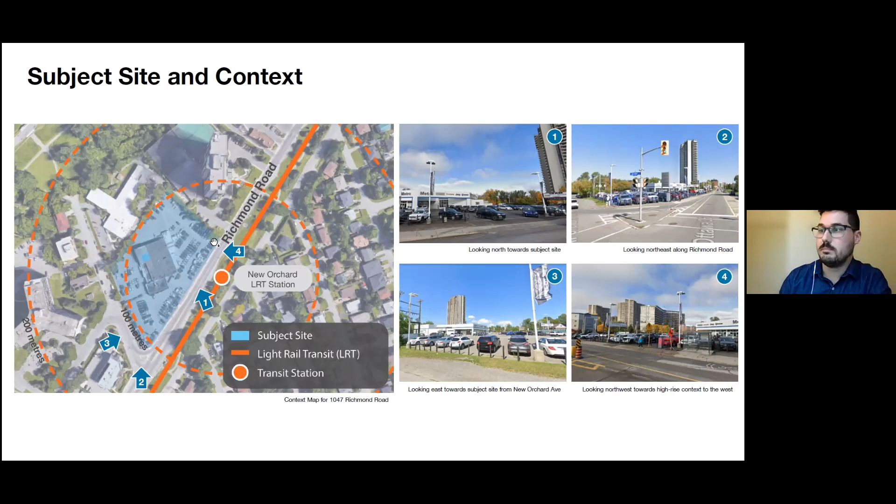If we're looking at the context, image number 2 is really good at looking at the corner of New Orchard Avenue and Richmond Road, which shows the single-story vehicle car dealership currently at the site, as well as some of the high-rise context currently around the property, including the 28-story condo building just to the east, as well as high-rise buildings along Ambleside and further to the west. To the north, there's the New Orchard Lodge, as well as walking paths and bicycle paths along the parkway. The plan context here really seeks to accommodate high-rise built forms, specifically along Richmond Road on the northern edge, closer to the LRT stations.

This slide discusses City of Ottawa official plan policies. With these applications, a review of the current City of Ottawa official plan, as well as the forthcoming new City of Ottawa official plan, was conducted. Under the current official plan, the site is designated Traditional Main Street. The plan context for Traditional Main Streets is a development pattern that seeks to promote a mix of uses, continuous storefronts, and densities that support pedestrian environment and transit. There are policies that encourage dense and mixed-use development near transit and that support increased walking and cycling. Typically, mid-rise development is permitted along main streets; however, a secondary plan or area-specific policy can permit greater building heights or high-rise buildings.

Policies for traditional main streets really support a building format that encloses the street and defines the street edge with more active frontages, and seeks to discourage vehicle uses such as parking lots or drive-through facilities, and really wants to relocate parking underground and away from the traditional main street.

So then we can go into the new official plan policies. As these applications were submitted in February, they were submitted under the current official plan, but we do recognize that the new official plan has been council approved, but is not quite yet in full force and effect until it receives ministerial approval from the province. So the property is located in the inner urban transect area and is designated a Main Street corridor. This transect area is really planned for mid and high density development, with greatest densities located closest to transit stations and corridors. Similar to existing traditional Main Street policies, the inner urban...

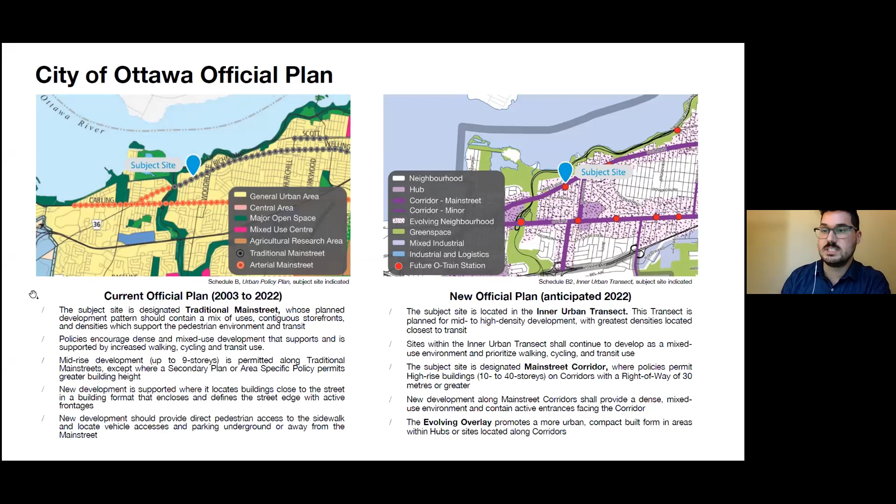So going to the next slide, the Cleary New Orchard area specific policy also applies to the property, which is designated station area and has active frontage policies that apply, quite similar to traditional Main Street policies. High-rise buildings are permitted in the station area and should generally follow the podium and tower approach in built form design. Building heights up to 20 stories are permitted at the subject site currently through density redistribution. However, considering the proximity to transit and other policies related to intensification, it may be a candidate to accommodate greater densities here. New development in terms of design should provide transparent glazing and active main entrances that face the ground floor and the main street, which leads into public realm policies as well.

You can see in this image that there's a conceptual location for a future public park or plaza at Richmond Road and New Orchard Avenue. There's a provision for privately owned, publicly accessible spaces that are intended to serve the area's outdoor open spaces on private lands with appropriate programming and multiple functions. Again, pedestrian access is really directed to the ground level uses through the building design and through the public realm policies.

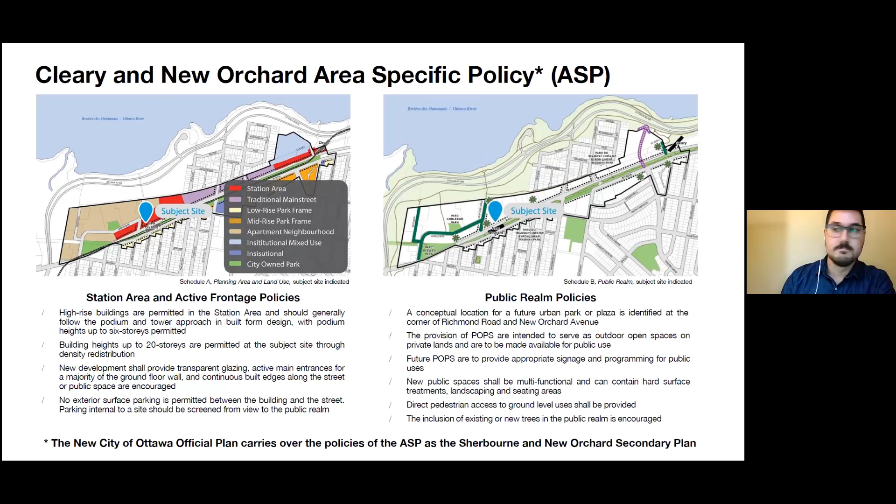There are urban design guidelines that apply to the property. The first being urban design guidelines for high-rise buildings, transit-oriented development guidelines, and urban design guidelines for traditional main streets. As this is a high-rise building, the first set of guidelines applies and really seeks to inform the building design and how the podium, middle, and top of the building interact with the public realm. Transit-oriented development guidelines apply to lands within 600 meters of transit, and traditional Main Street guidelines are location-based as well, applying to properties that front onto traditional main streets designated in the official plan. As this is an official plan amendment and zoning bylaw amendment application, design details will be worked out and further refined through subsequent site plan control applications, through discussions with city staff.

So the existing zoning on the property is traditional Main Street zoning, and this zoning really implements the policies of the official plan and seeks to frame the street and craft development to look like what the official plan policies intend, which is to accommodate a broad range of residential and non-residential uses through mixed use buildings. They seek to foster and promote compact building design, pedestrian-oriented development that can be accessed by pedestrians, cyclists, and transit.

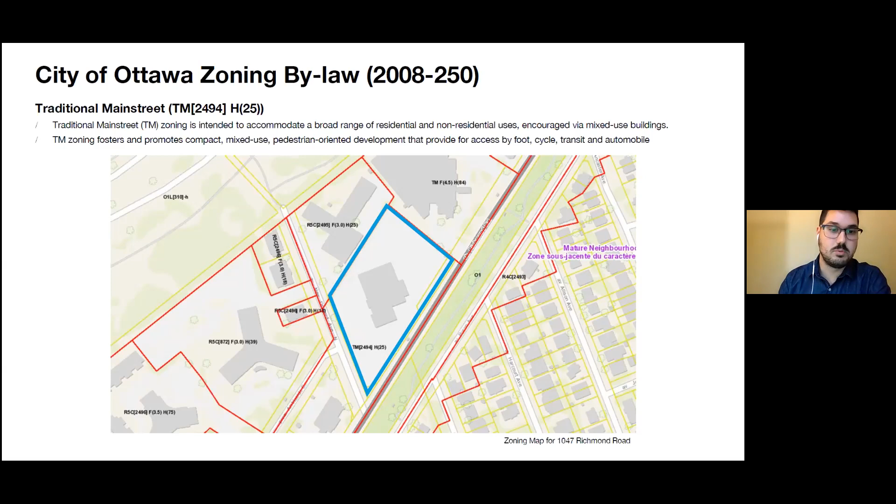No vehicle parking is required as the site is located close to transit. However, 90 visitor parking spaces are required here, as well as bicycle parking at a rate of 0.5 spaces per unit.

So before we get into the application, what was submitted as part of the applications in terms of design - this is a concept plan that was prepared for the pre-application consultation, and I can run through what that concept looked like. It located a new public park central to the site, which transitioned to a courtyard area that accommodated at-grade pedestrian use and vehicle pickup and drop-off.

The greatest building heights were allocated towards the transit, as close as possible to that transit station, and then a podium wrapped around the perimeter of the site, really enclosing that plaza central to the site. There was a bit of a podium just at the front here, and you can really see that through the conceptual massings looking north there.

When we got feedback from the city, they gave feedback on the location of the park, wanting it to be located at the corner of New Orchard and Richmond Road, and looking for more of a transition from the towers and separation distance between those.

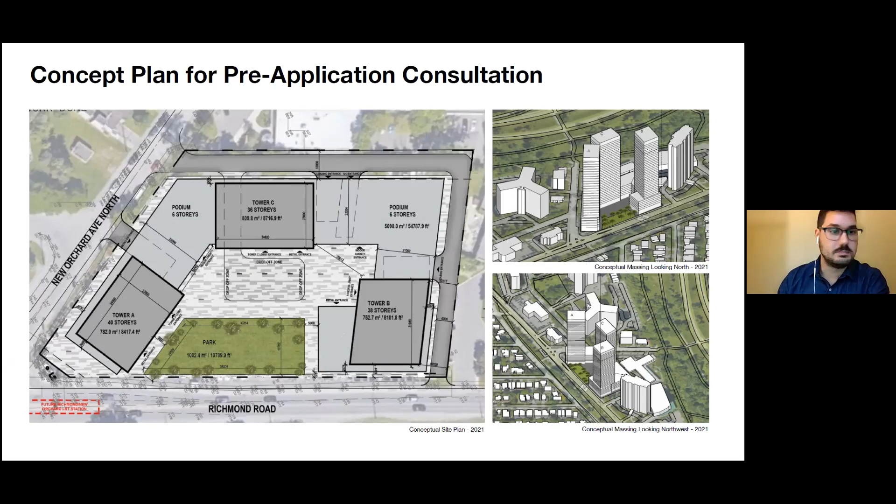And then within the podium, there's 290 units, all of which are a mix of studio through to 3-bedroom units. It's worth noting that I believe 53% of the units proposed here are 2-bedroom units or greater, and 203 units, or 15%, are barrier-free units throughout the development.

At the corner of Richmond Road and New Orchard Avenue, there's a just over 1,000 square meter new public park proposed, in addition to 22,200 square meters of amenity space, which includes an internal courtyard plaza and retail space located at the ground level along Richmond Road and fronting the proposed park. There are 3 levels of underground parking containing 762 vehicle parking spaces and a total of 678 bicycle parking spaces.

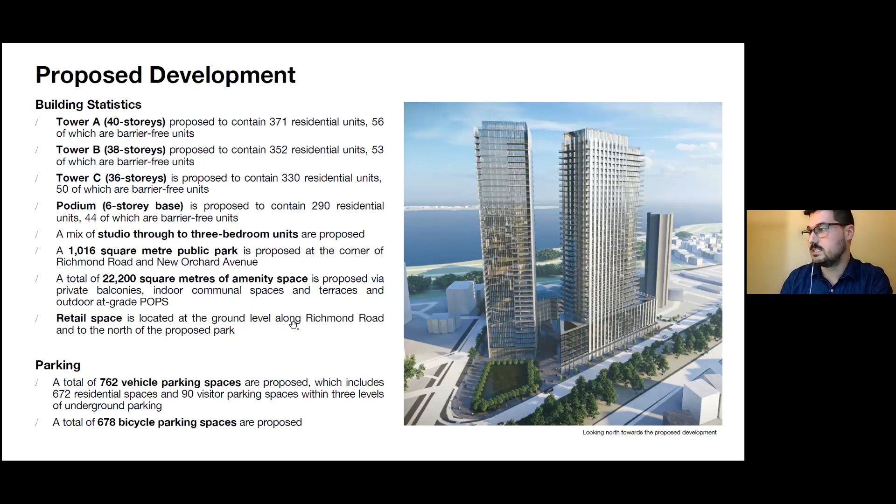So to run through the amendments for the property, there is an official plan amendment application which would seek to amend the Cleary and New Orchard area specific policy, specifically policy 4.1.1, to allow high-rise 31+ story buildings at the property, and to amend Schedule C, which would amend the current 20-story permissions to allow building heights up to 40 stories, as well as 3 zoning bylaw amendments.

The first is to allow a high-rise apartment building up to 40 stories in building height. There is an urban exception applied to the property which seeks to have a setback above a 2-story podium; however, a 6-story podium is proposed here. There is also a maximum interior side yard setback provision of 3 meters; however, a setback of 10.6 meters is proposed here, to allow greater transition between the towers and the interior side yard.

And this image here shows the zoning and policy framework and what could be done under that, in comparison with the proposed massing.

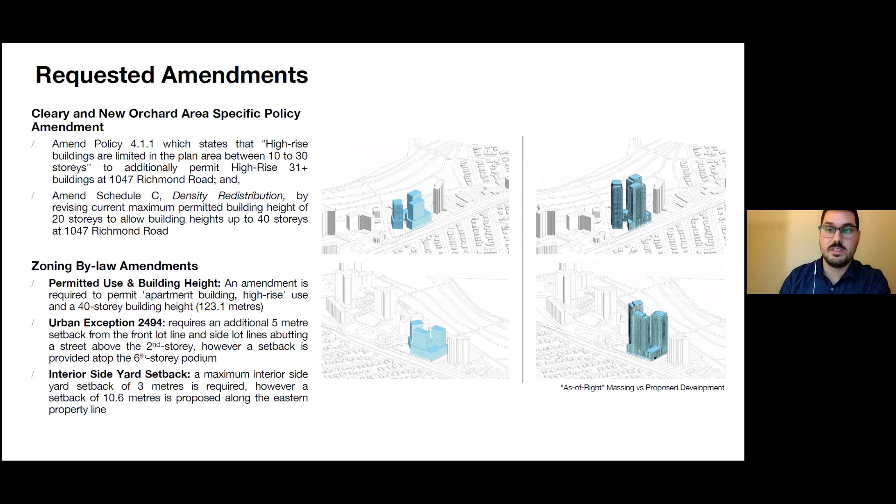So the site plan here, if you recall the initial concept plan, you can see some of the differences that were taken into consideration after conversations with staff. The park has been relocated to the corner of New Orchard Avenue and Richmond Road. This podium has been extended along Richmond Road and contains retail space at grade.

And the internal plaza, I guess, is still maintained here as well. And now is a good time to hand it over to our architect team from IBI, I believe Mansour, and he can walk you through the design.

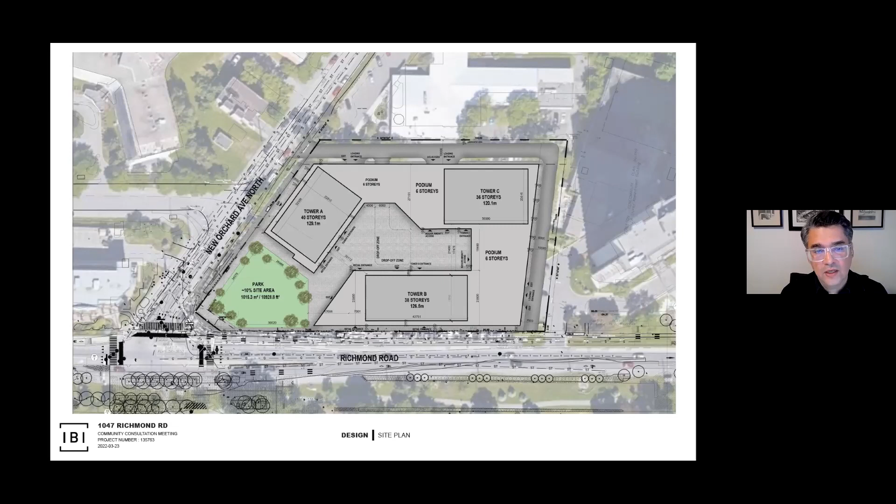One other key aspect is that we have provided a peripheral driveway at the north and east end of the site, which accommodates all of the service-related functions, so that along the length of the property there are no curb cuts. So we have an uninterrupted pedestrian and public realm.

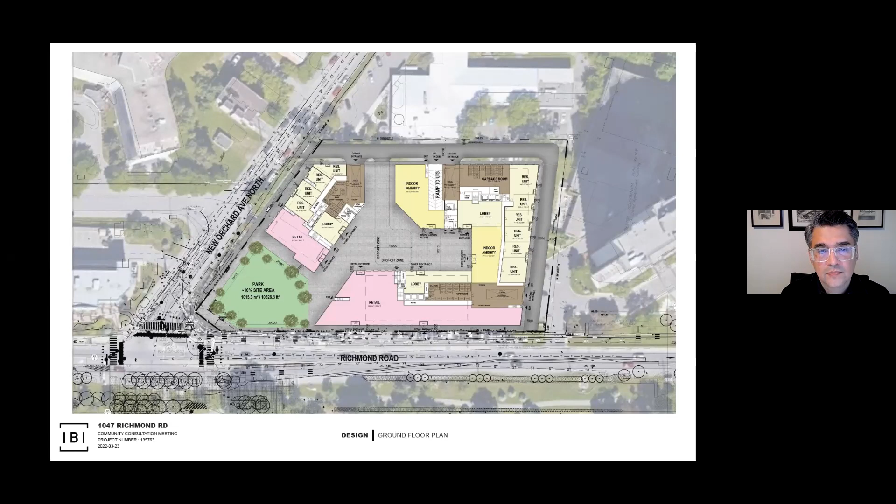This is a slide that shows you the uses at the ground floor. The primary vehicular access is from, I'm going to refer to the top of the drawing as north, knowing that north is actually diagonal to the site. But the primary vehicle access is from the north, where you come into this courtyard drop-off area.

Just past that is the access to the underground ramp. So most of the vehicular access would occur from that peripheral road, which wraps around the site. And that courtyard is where we are providing access to the three lobbies that are shaded in the light yellow color, which are all accessed off of the courtyard.

And the brighter yellow spaces are indoor amenity spaces that are provided at the ground floor level.

The frontages, the key frontages on Richmond Road and New Orchard and facing the park are occupied by retail that's delineated in the pink color. There's, I believe, over 14,000 square feet of retail between the two spaces that's provided here.

And then the remainder of the frontage on New Orchard is occupied by grade-related residential units, as well as on the east side, similarly, we have grade-related residential units. So there's been an effort to ensure that the majority of the frontages are active animated uses with entrances, uninterrupted public realm, opportunities for tree planting and enhancement of the sidewalks, and obviously activation through the use of retail on both Richmond and New Orchard.

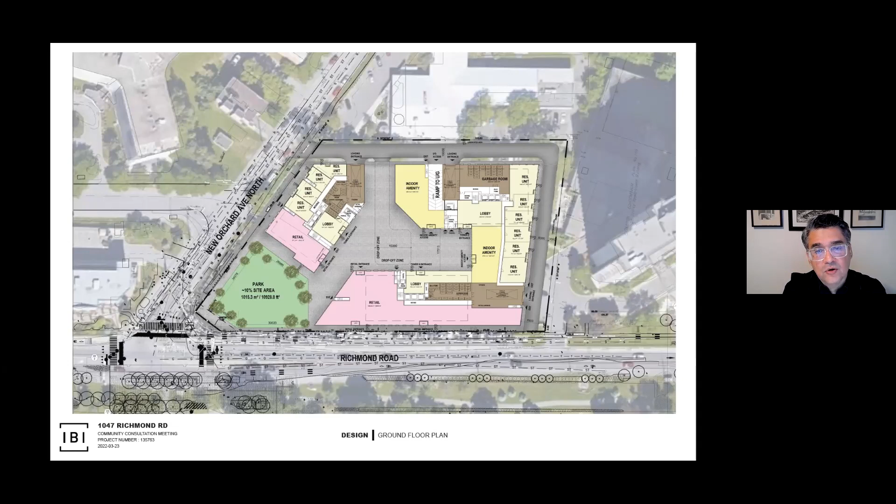So once you get above that, we get into typical podium floor plans, where you start to see a mix of studios, 1s, 2s, and 3-bedroom apartments. The color coding refers to the different sizes. Also interspersed with this, at the two inside corners, you see indoor amenity spaces that are provided for the residents of the development.

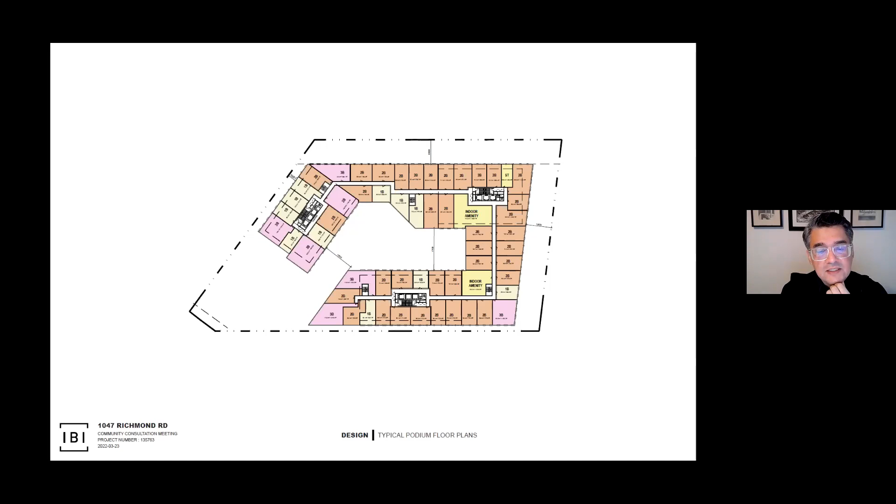And then residential typical floors begin above that.

The residential floors are oriented along the length of most of these towers, with maybe one unit that's along the short end of the towers. And in relation to that, we have organized the balconies to predominantly be along the length of these buildings and just turn the corner on each of the short sides, which helps to break up the form a little bit, as I will show you shortly.

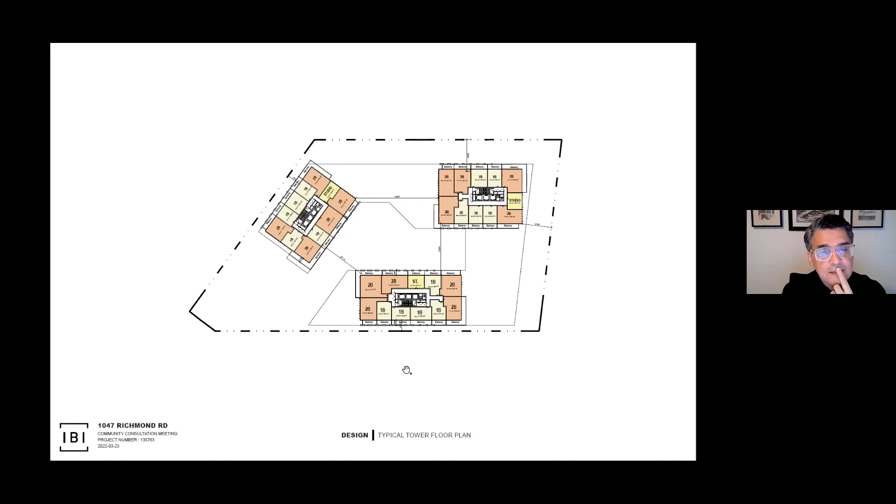Parking: there are 3 levels of below grade parking. I believe Nathan said 762 parking spaces, for both residents and visitors. So there will be parking below grade to accommodate both.

Also located below grade is bicycle parking in weather protected areas. These are below grade in close proximity to the elevator cores.

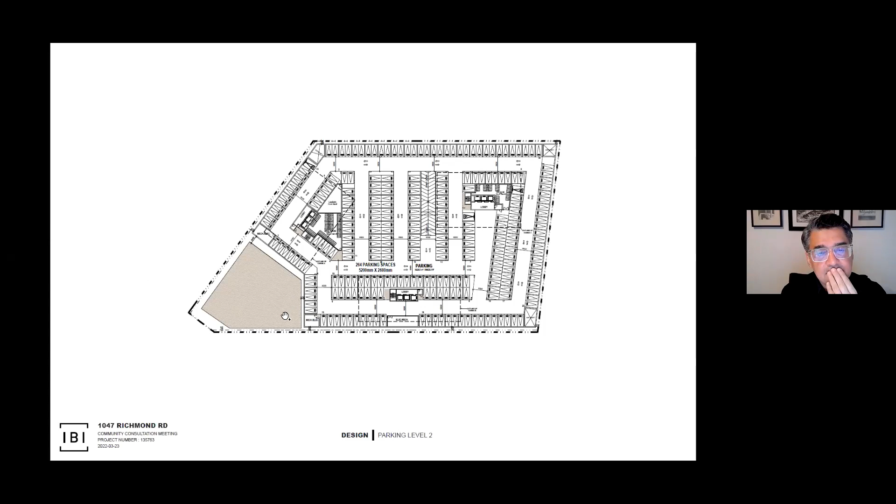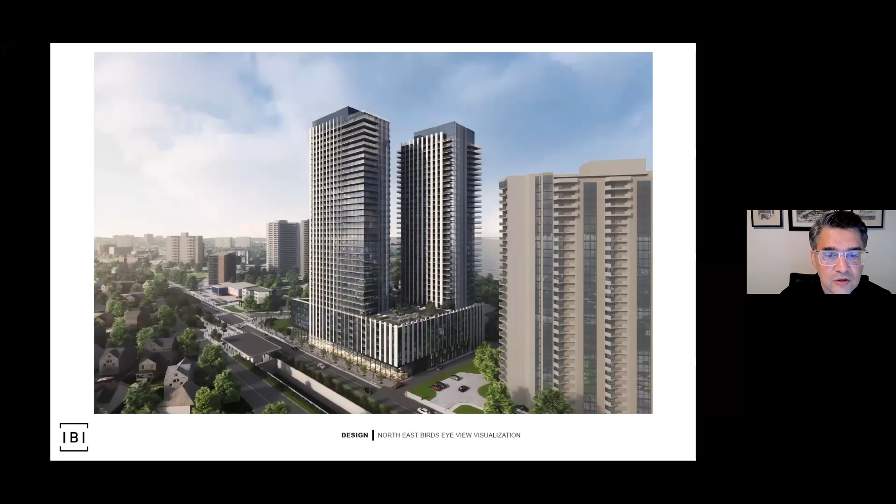Next slide please. The other thing visible in these slides is the rooftops with landscaped amenity spaces. This shows the northern face of the building with the covered vehicular access into the courtyard, and access to parking along the peripheral road that wraps the north and east side of the development.

The manner in which the fins are articulated plays up the contrast between faces which are all glass and some which have the fins, so there's always visual variety no matter which vantage point you look at these buildings from.

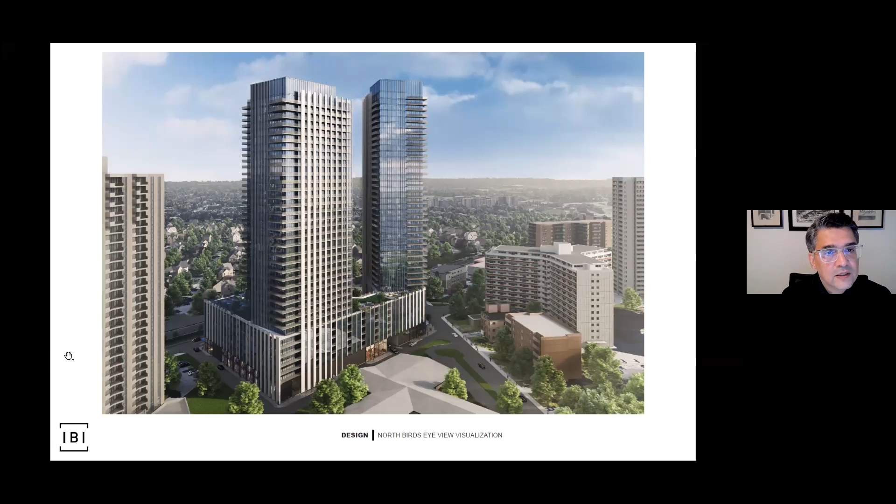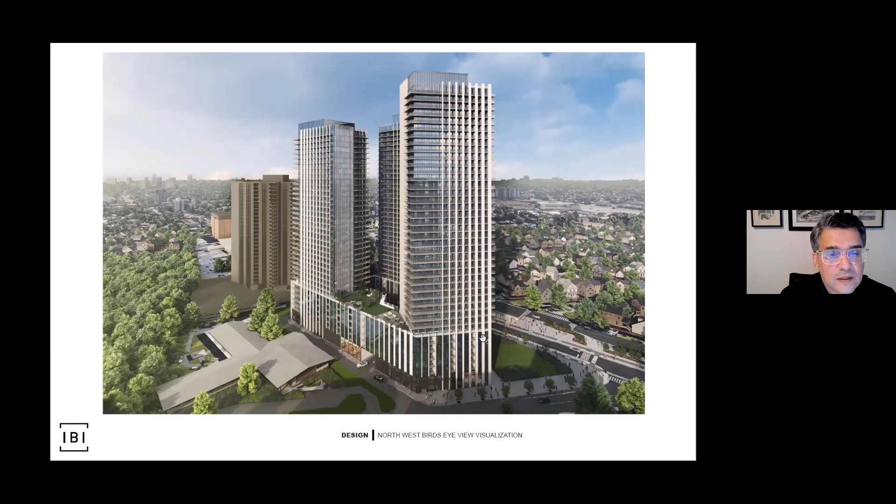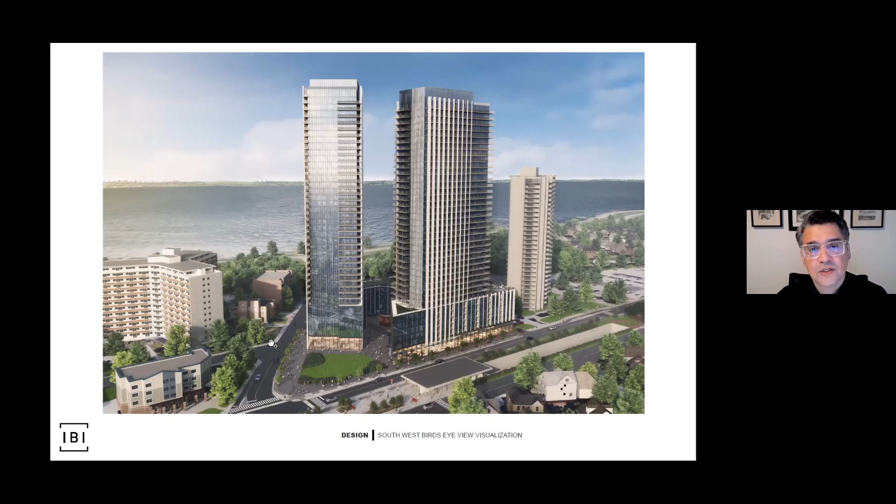Another view, this looking northwest towards the park at the corner. This is with the tallest building in the foreground, looking at the corner of Richmond Road and New Orchard Avenue, with the park in the foreground and retail fronting onto it. Once again you see the juxtaposition of the glass facade with the vertical fins.

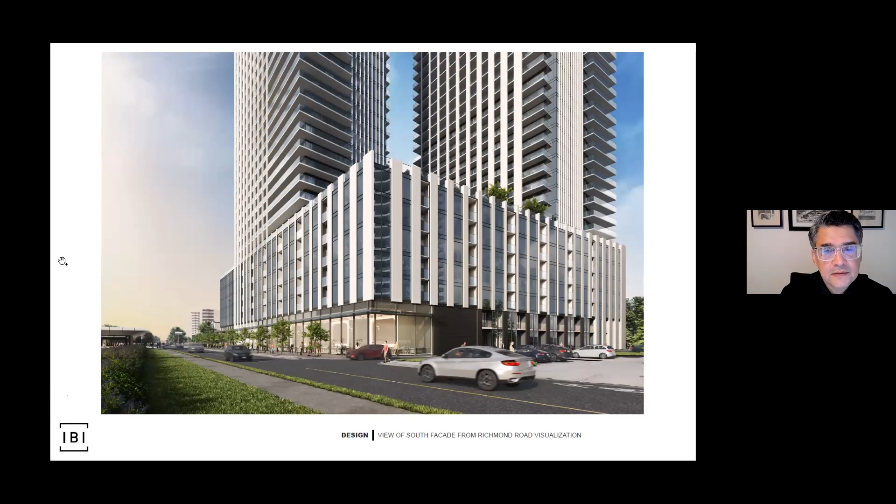This is more at eye level along Richmond Road, looking notionally towards the corner. I believe it's a view from the park across the street, with the LRT station, the New Orchard LRT station, on the bottom right, the park across the street, retail frontages with canopies overlooking the park, and access into the courtyard leading to lobbies and entrances into the various buildings, the six-story podium, and the tower element integrated by the vertical fins.

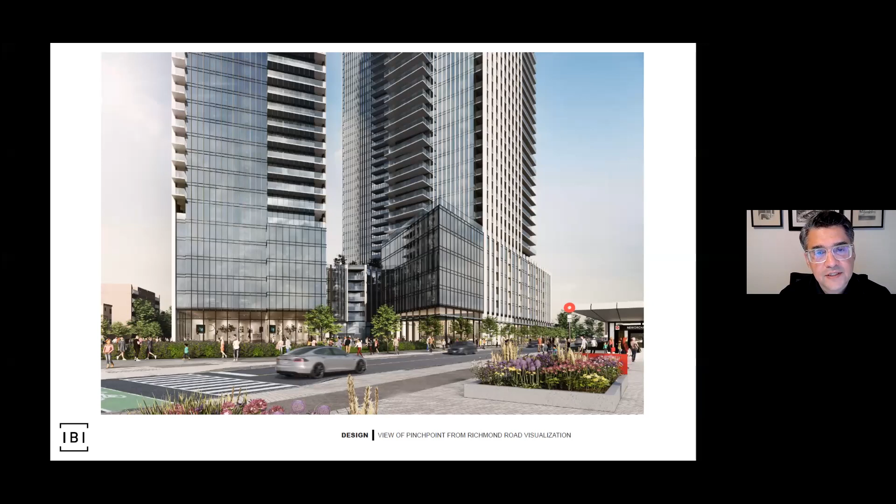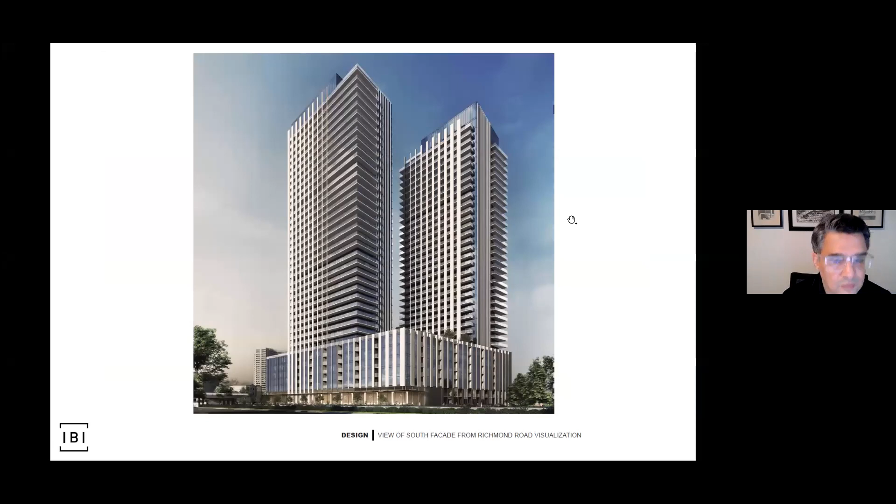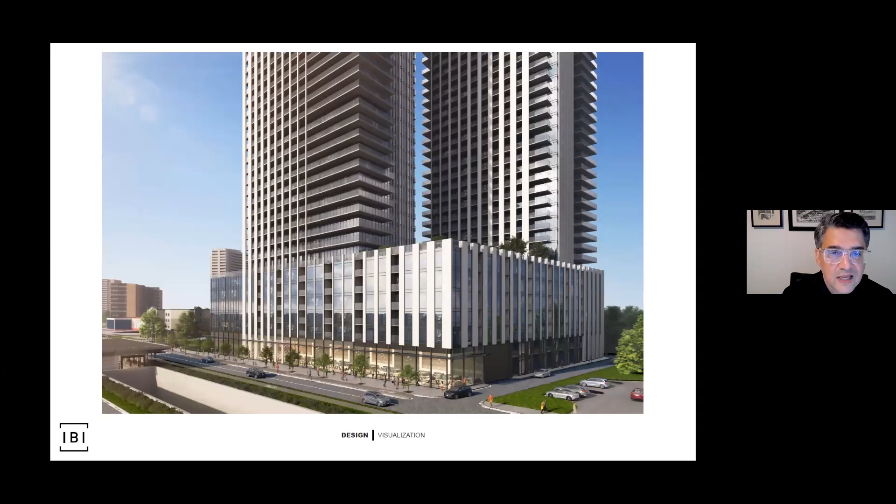Another view from the south face, giving yet another vantage point of the development. I think it's getting a bit repetitive, so we can keep going.

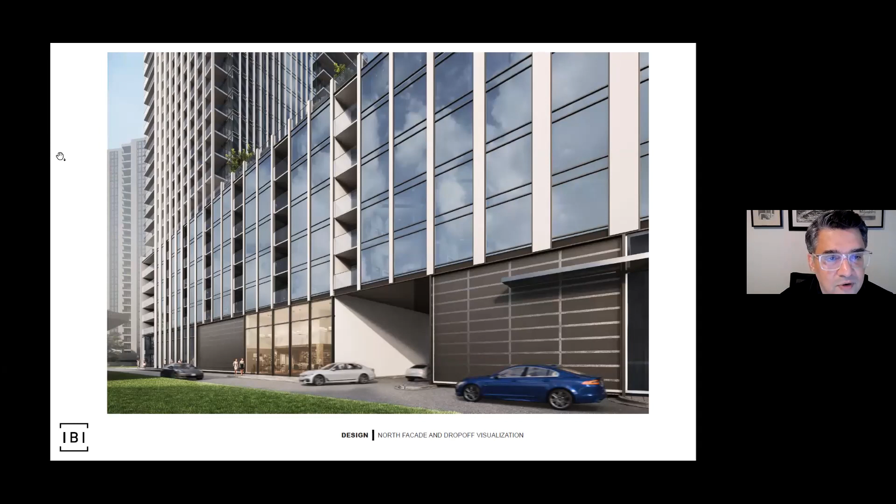This is a close-up from the northern peripheral road showing the covered driveway access and generally the north face at grade. You're also seeing that balconies are fully integrated into the development, so there aren't too many projecting balconies, creating a fairly simple, clean, unified facade expression.

I'll stop there and I'm happy to answer any questions.